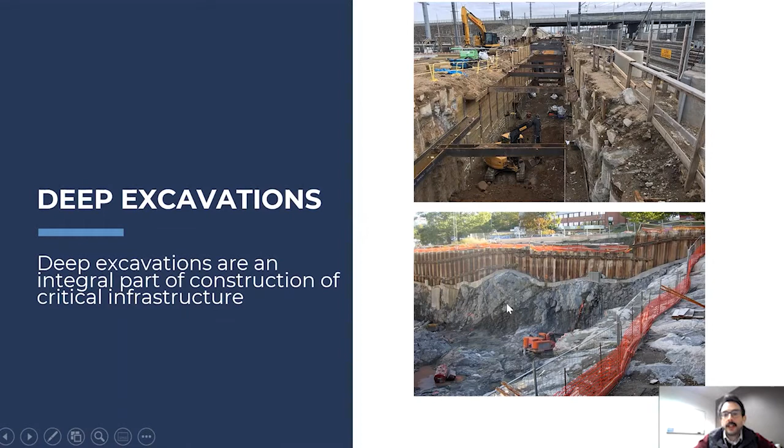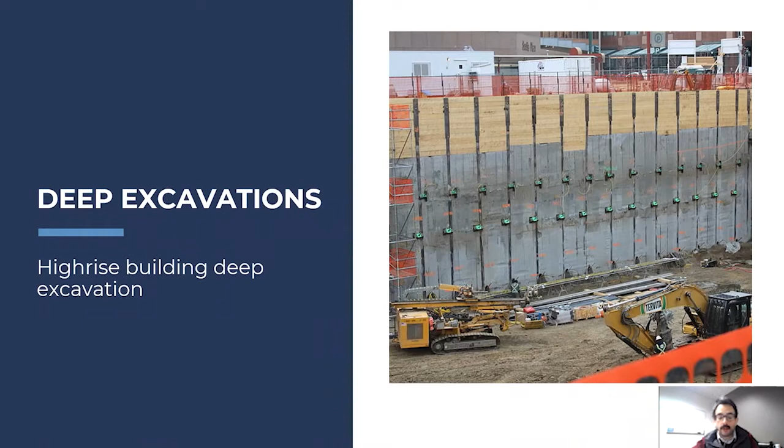The deep excavations are used in many applications. As we try to build in dense urban environments, deep excavations are needed more and more. For example, you see here a system for a high-rise building, and deep excavations have a few key interesting characteristics that are very necessary to develop our projects, but they also have high consequences if something goes wrong with them. So I'm going to share a few snips of some failures.

For example, about 20 years ago, massive damage on a deep excavation at Nicoll Highway in Singapore occurred, and we're going to talk a little bit about this at the end of this presentation.

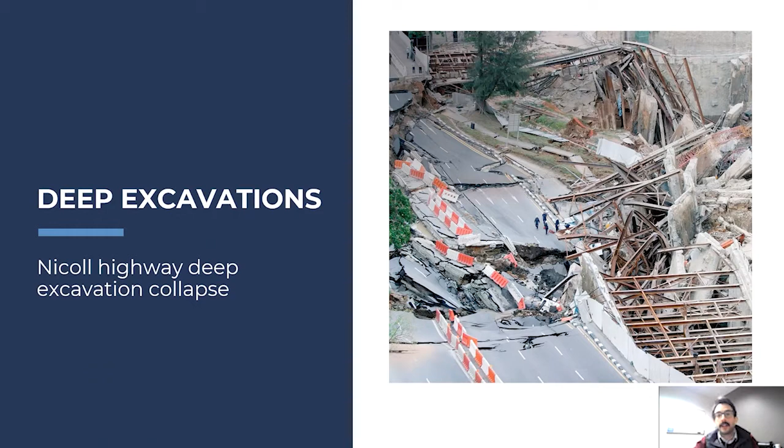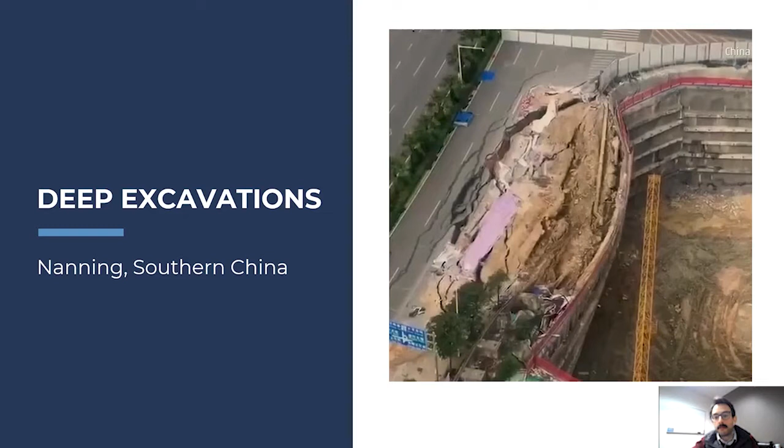Another deep excavation failure recently surfaced in the news, a project in Nanning, southern China, and you can easily find the YouTube video. You can see multiple levels of support bowing and allowing the soil to move.

Another very famous deep excavation failure happened in DC in the 90s. That's a deep excavation investigated by OSHA at the time. Fortunately, there was no human loss during that.

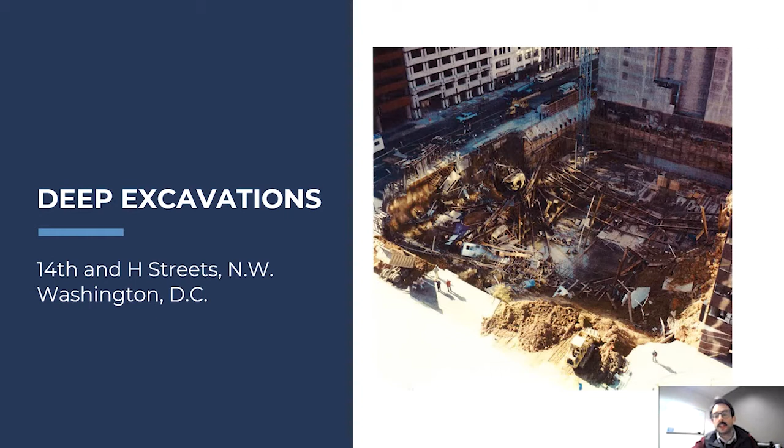So, with that, deep excavations are necessary. Deep excavations are risky, but we know how to design these deep excavations, and we know how to construct them well. With this seminar, my hope is to cover some general introduction about the systems. We're going to talk about some basics of their design, and we're going to cover some very specific challenges on deep excavations, how to manage the risk of these projects, and how to monitor their performance.

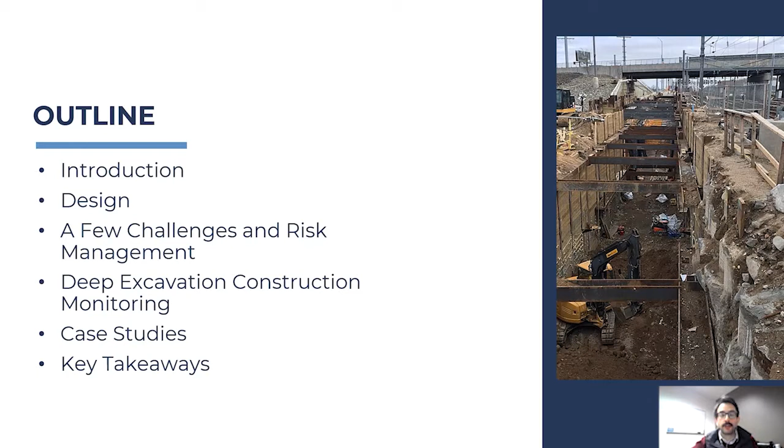At the end of this webinar, after we've gone through the basics, I want to combine all these theories and practical guidance with 3 case studies and talk about some key takeaways. In the middle of the presentation there will be a few questions, and Jay will pop up a nice poll for you to provide your answers.

So let's really start from the basics. Deep excavations are basically excavations that are more than a few feet deep, and because of that we need to find some way to support the soil on the sides so that it doesn't fail through the open excavation.

The support of deep excavations can range from structural walls with bracing to soil nailing. These excavation support structures can be either temporary, that we only need during construction and then we're done with them, or they could be permanent, where we need to perform this excavation support and leave it there because that's the actual long-term project we're constructing.

The stability of these systems must be maintained at all stages of excavation, and that turns out to be a quite complex operation. It's also very important not only to control for stability, but also to provide deformation control—making sure that our support of excavation system does not move too much, and adjacent structures also do not move substantially because of the performance of the support of excavation systems.

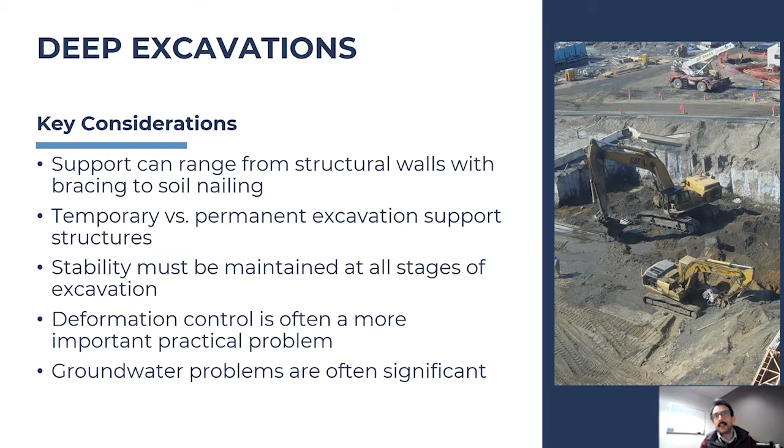An interesting thing to note is that these four systems that I just presented were mentioned in order of increasing stiffness. Generally, soldier pile and sheet pile tend to have the lowest stiffness, and secant or tangent pile wall systems tend to be stiffer.

Typically, we create these cantilever systems to support deep excavations that are not extremely deep. It's not very common to use this system for excavations deeper than 30 feet. Generally, the maximum excavation depth is controlled by soil resistance because this is what provides the support to our wall.

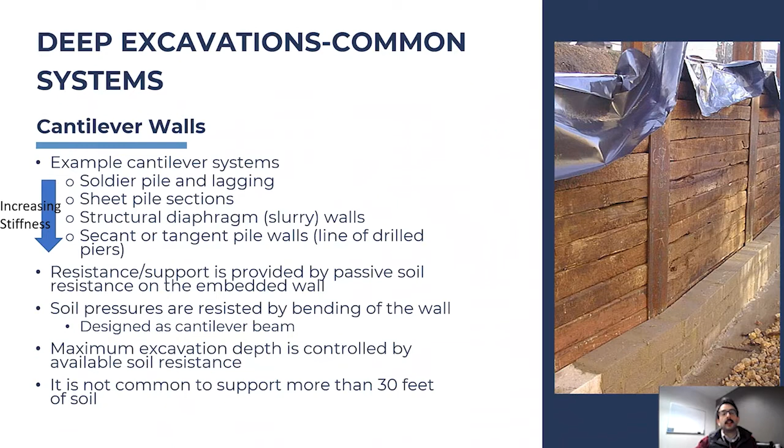However, we can also have tension elements, for example tiebacks. These elements can be temporary or can really be a permanent part of a structure. For example, if this deep excavation was part of a big basement building, the bottom slab of this building may actually be providing some long-term compression support for this particular installation.

When we have anchored systems, there are many different designs, and those can have anything from lower to higher stiffness. The anchors can either be grouted into the soil or grouted within the underlying rock.

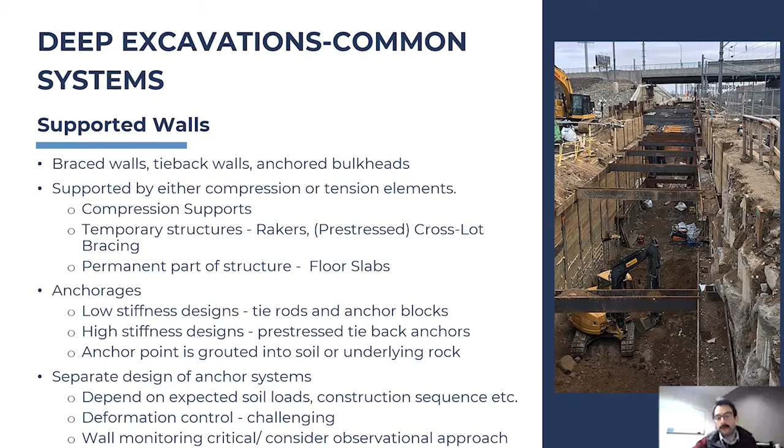So let's focus a little bit more on braced excavations. Braced excavations is one type of support where the walls of the excavation are supported with braces, and this lateral support system may be braces on one level or multiple levels of support. Sometimes there can be bracing that goes across the entire lot.

The three main geotechnical issues we're trying to address when we do our design: number one, we need to design the bracing based on the maximum expected loads. Number two, we need to maintain the stability of the excavation at every single stage of construction.

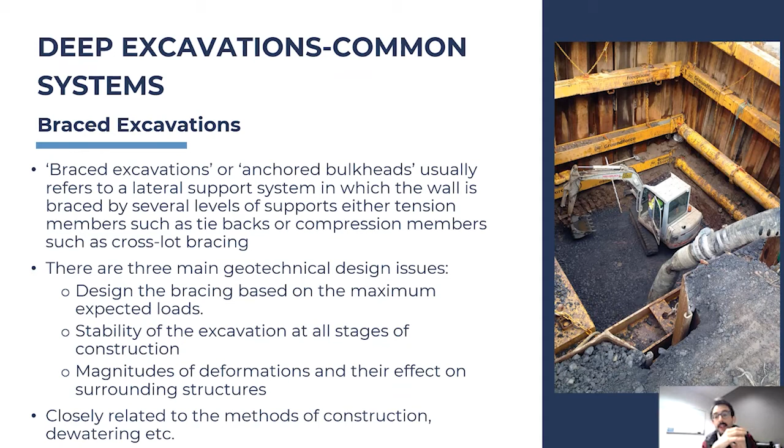Even if we have a structure that's stable with members having strength higher than required, we may need to control the deformations and their effects on surrounding structures. Because of all these design issues, we generally need a very good understanding when doing our design of the actual methods of construction, the dewatering being performed, the actual sequence of construction, and very good communication between the design team and the contractor team.

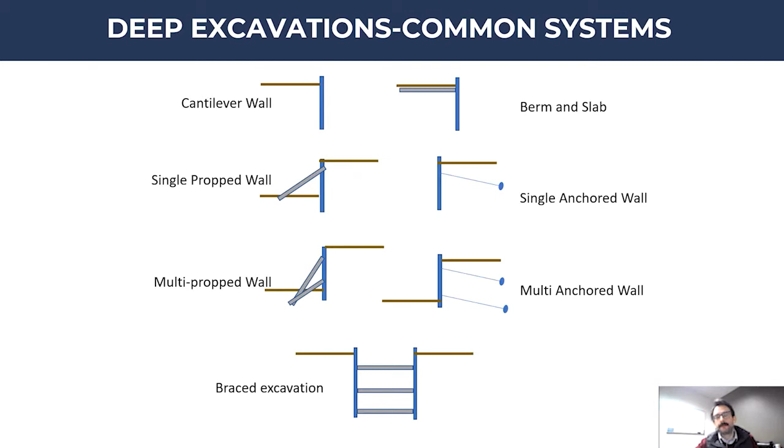One thing that contractors know generally how to do relatively easily is soldier pile and sheet pile walls, and these provide low initial costs.

But if you remember our discussion that we had a few moments ago, this type of wall tends to deform more compared to other walls because they generally have lower stiffness than other systems.

Another interesting thing to note is that if you want to provide supportive excavation at a deep soft clay type of site, it's really hard to get a tieback capacity, so it's not the right type of place to put anchors. You can still design them, but it's generally not going to be easy.

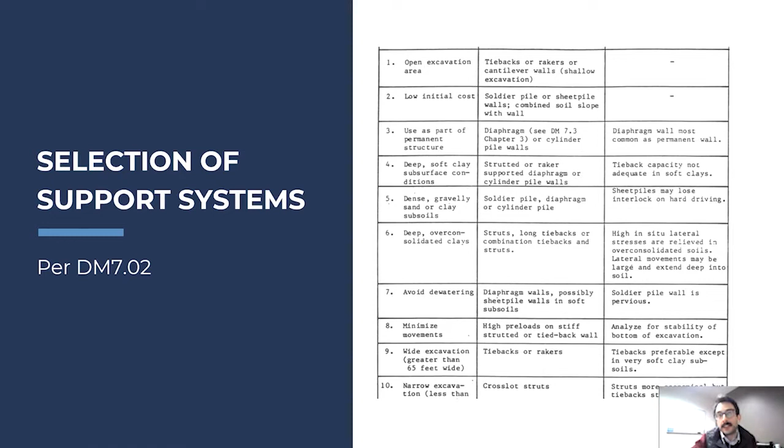Another thing that's important with the selection of the support of excavation system is how they affect the groundwater table, lowering it outside the perimeter of our project. For example, if you look at number 7, one recommendation is that soldier pile walls are generally pervious, and that's something you need to account for if it can affect adjacent structures.

So let's start talking a little bit about the design of this system. We know what they are, we know how they look, and their main function is to support the soil, and support it in a way that may also need to control deformations.

So if you're in the condition that your wall is moving away from the soil, this is the Rankine active condition. If your wall is pushing towards the supported soil, this is the passive condition. The horizontal passive earth pressures can be much higher compared to the active earth pressures for the same soil. However, you need different levels of deformation to reach active versus fully passive pressure conditions.

For example, one precaution used traditionally is that the passive earth pressures you may be assuming for your design may not be accounted for fully, and there may be a safety factor applied specifically on the passive earth pressures to account for the fact that you need some more substantial level of deformation to activate passive earth pressure.

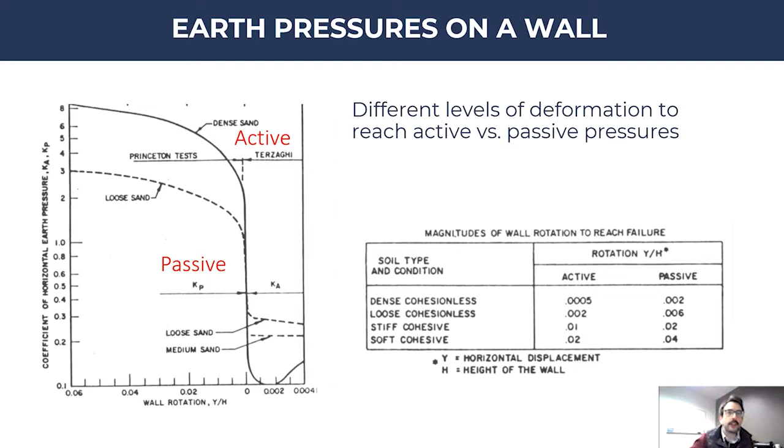So let's think about these diagrams a little bit. As geotechnical engineers, we're very used to seeing pressure diagrams that start from zero at the top of the soil at the ground surface and increase linearly with depth. Similarly, horizontal pressures may have a similar progression with depth. However, what you see in these diagrams is quite different.

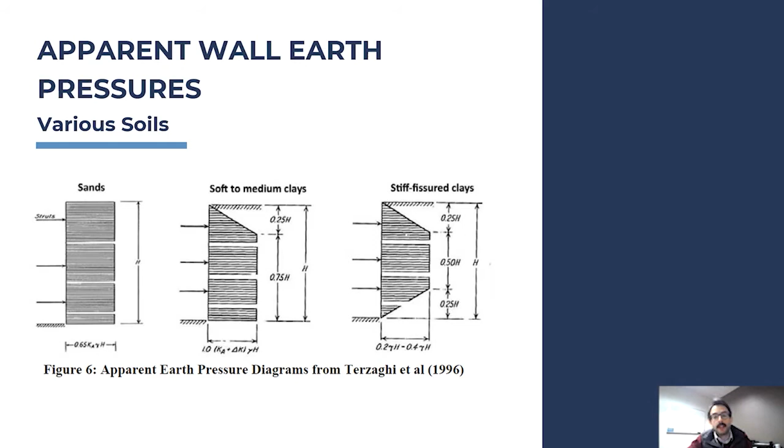The really key point to know about apparent earth pressures is that they do not necessarily represent the actual soil loads. They do represent the maximum soil loads that will be experienced at every level of excavation while the excavation is taking place, providing a locus of these maximum pressures that can be used for our preliminary design. So it's quite different from the actual Rankine active and passive earth pressures.

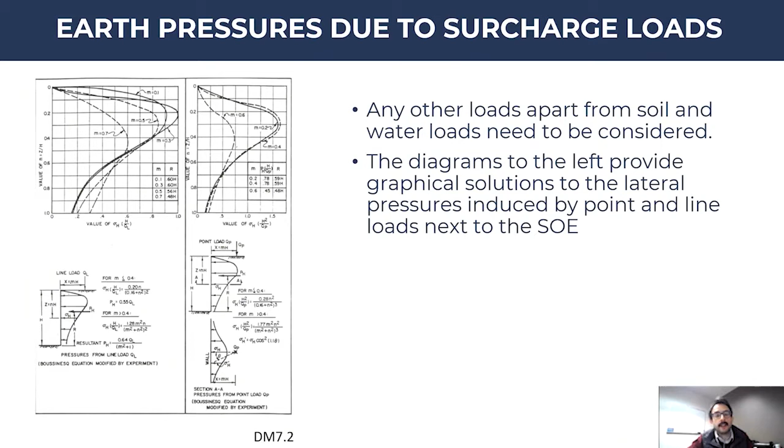That can be easier or more complex, and if it's more complex, a simple diagram like that may not be sufficient.

Another thing that's quite common in both sands and clay sites is you need to make sure you account, on these deep excavations, for the stability of the base of your excavation.

In many situations, you may require a more complex solution or a finite element analysis. If your retaining wall is in clays, you expect much smaller seepage going into your site. However, in clays, you may have to account for basal stability, and you may need to even use slope stability software to evaluate that.

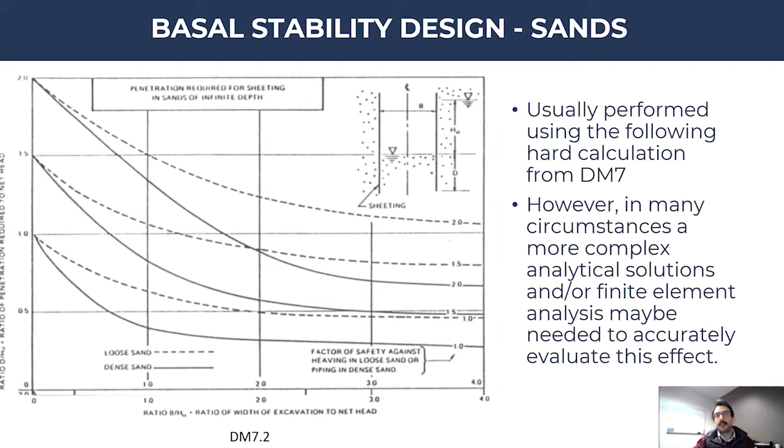And then there are a lot of internal components on the wall, on these supportive excavation walls, you need to be designing for. I'm going to just briefly mention here some information about anchor and tie rod design.

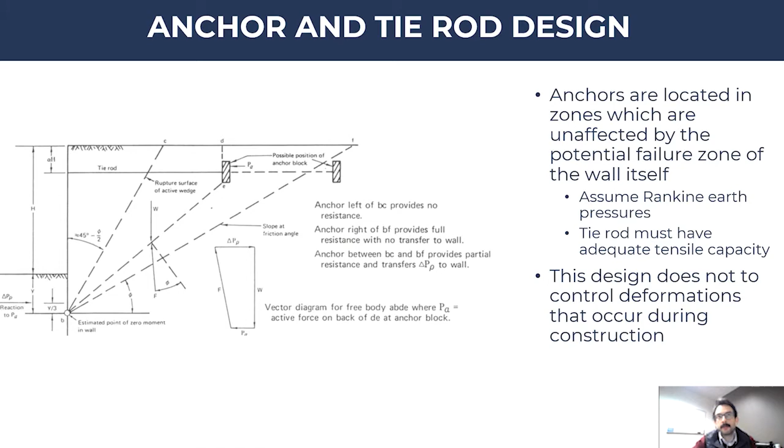At the same time, the actual anchor block should be designed in a way that supports the tie rod's expected loads. And the anchor block can actually be designed quite straightforwardly.

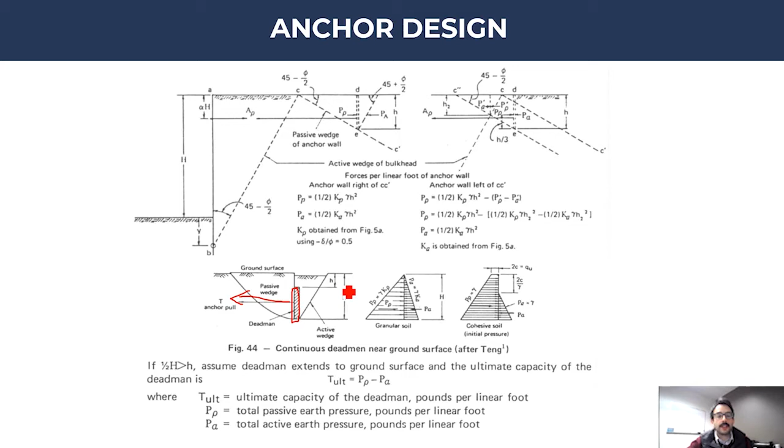So with that, I hope you just try to scratch the surface of how complicated deep excavations can really start to be. If you start to really consider the appropriate soil constitutive behavior and the complexity of the structural systems and the soil structure interaction, some of the answers you want for your design may not be easily obtained by simpler solutions.

One way that's used more and more these days is to perform finite element analysis of deep excavations. There are quite a few challenges when we use finite element analysis, and one key issue is modeling the appropriate constitutive soil model response. We can have a lot of different soil responses and soil behaviors that may be useful for our analysis.

We may need to consider the drained response of the soil, the undrained response of the soil. We may need to consider partial drainage and flow, and we may need to consider partially saturated behavior.

Then the other part is to appropriately model our structural performance. If we create a model of a deep excavation, we need to have enough complexity that the structural system is sufficiently modeled. And then we need to know that the soil structure interacts in our model in a way that's appropriate and realistic. In its simplest form, we may need to provide the right frictional interface of structural components and the soil. In some other situations, we may need to provide the TZ response or PY response of pile elements.

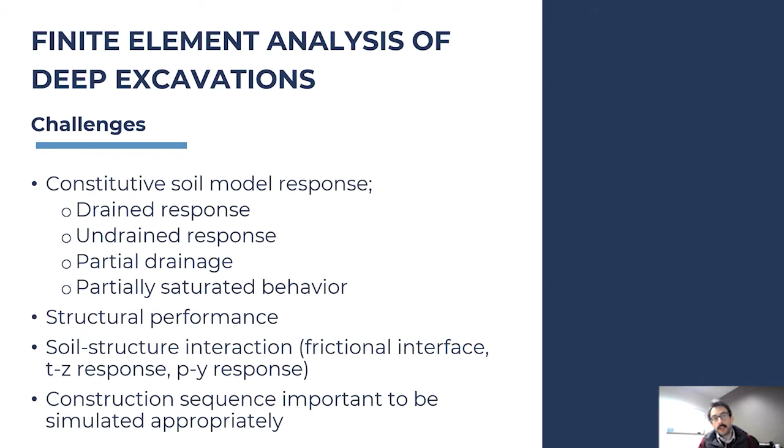And again, as we mentioned a few slides ago, the construction sequence, all the construction activities that are going on, including dewatering, waiting times, are really very important, and we need to make sure that these are simulated appropriately. One of the uses of finite element analysis is really to control for displacements.

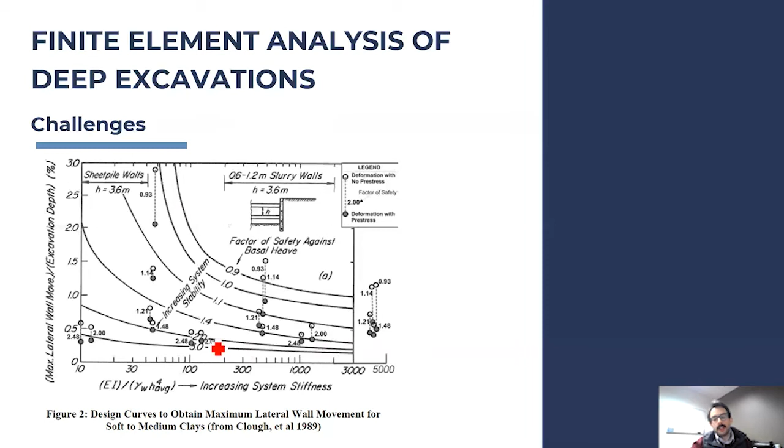Okay, so now deep excavations, as we said, they're big operations. They involve a lot of time, a lot of construction activities, and they're complex. And because of that, it's quite important to be able to analyze the risks of them as construction projects. Just to give you an overview, what I call risk management here is a systematic approach of identifying, analyzing, planning, monitoring, and responding to project risk.

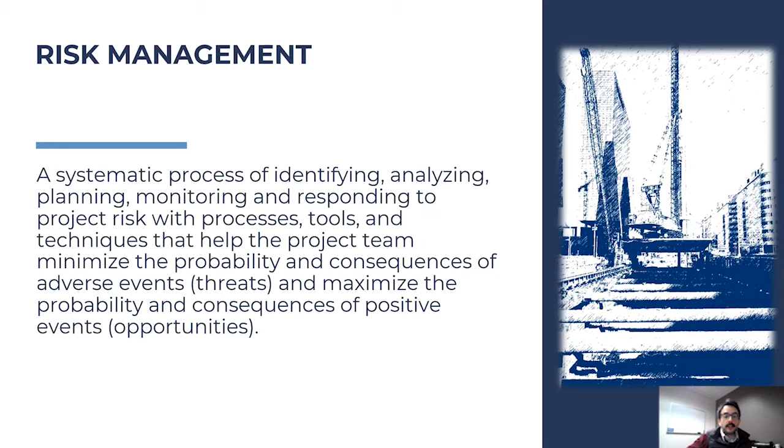And the way to do that is you can do that with processes, tools, and techniques that can minimize the probability and consequences of adverse events, and also maximize the chance that good things happen, positive events. So a few fundamental things we need to be doing when we're thinking about risk management is we need to know what the risks are and what are their potentials in cost, schedule, quantity, and we need to eliminate, mitigate, or avoid risks when able.

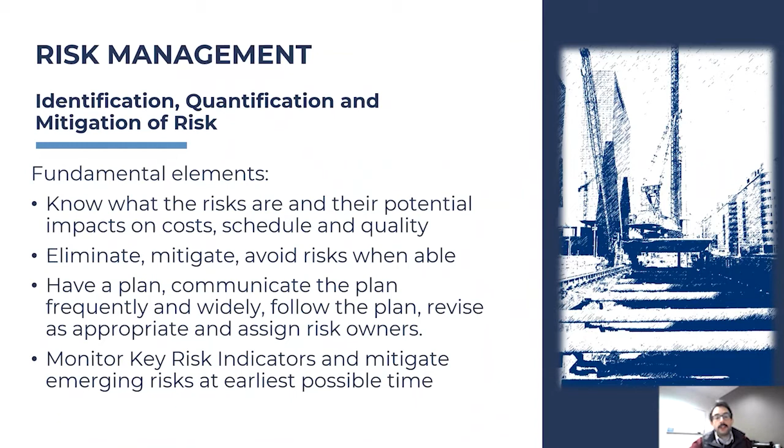We need to have a plan and communicate that frequently and widely, and we need to have something quantifiable to measure. That could be some key risk indicators. And as we're able to measure these indicators, we need to find a way to mitigate these emerging risks. So some key actions on performing risk management in general, and then we're going to talk about specifics on deep excavations.

We need to, number one, plan a risk management approach. How will the project approach the risk management? We need to be able to identify the risk events. We need to be able to analyze them. In some cases, we're able to qualitatively analyze the risks; in others, we have the opportunity to analyze them in a quantitative way.

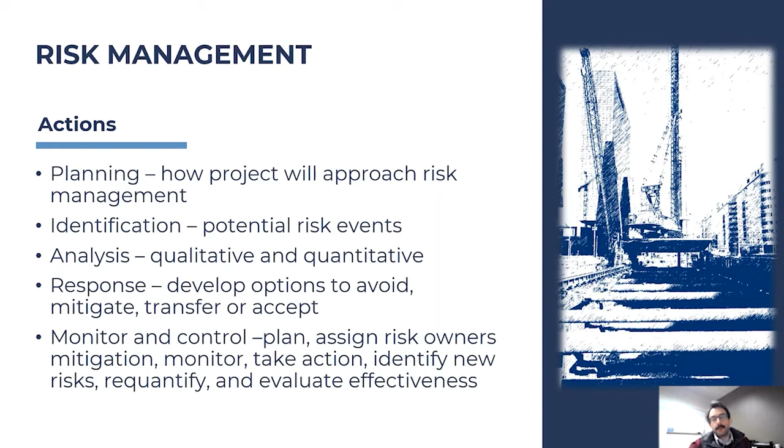We need to develop a response. And as we discussed, we need to monitor and control. And then we may need to go back to our drawing board and update our risk management system as the project moves along and some parameters change.

Now, in a few large projects, we can find some similarities. Number one, the bigger the project, the less likely one or two people can really get their arms around a balanced assessment of risk. And the contractors generally price the risk.

They may understand that there is risk and they may increase their price to do a more risky job. But one thing you need to be thinking is, do they have an objective and even quantifiable approach to do this? Sometimes various contractors may choose to transfer the risk from one to the other, but this transferred risk is not really reflecting a reduced overall project risk. And sometimes competitors on joint venture teams don't talk openly.

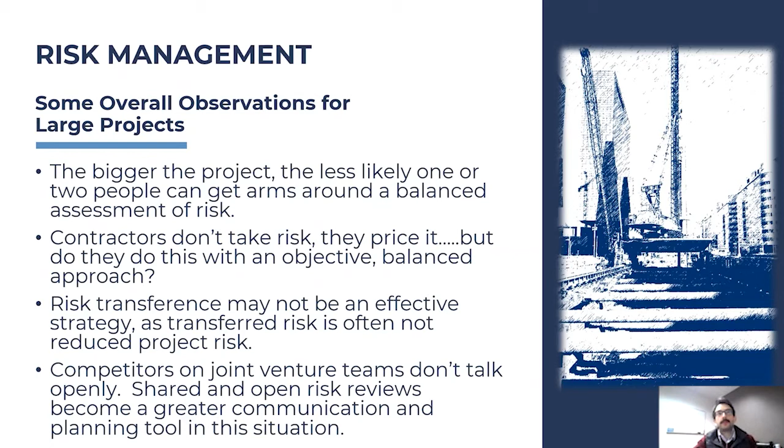So when we have shared and open risk reviews, this can be a great planning and communication tool that can be very useful. When we take care of our risk and manage it, we're able to reduce the project cost and delays. We can create a systemic, balanced framework to identify, communicate, and manage it. We can provide an independent assessment of the risk that doesn't have internal biases. Some entities in construction projects choose to do their own risk assessment, but that's bound to have some internal bias.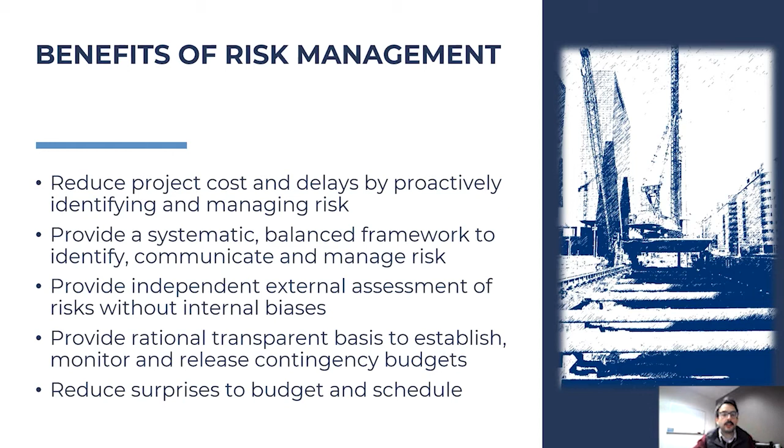With risk management, you can provide a rational and transparent basis to establish, monitor, and even release contingency budgets. And if you manage your risks well, you can really avoid surprises in budget, schedule, or any other losses that could be important. So specifically, in deep excavations, there are a few key considerations that make deep excavations quite risky.

Some of the things we need to be thinking about: number one, can the deep excavation system fail? That could be anything from a bearing capacity, basal stability, or global stability failure, or it can be a structural failure. Then we need to be thinking about damages to adjacent buildings caused by deformations or other contributing factors. We need to be thinking about groundwater control inside and outside the excavation, and a series of other issues such as potential for loss of productivity, delay, or even loss of life.

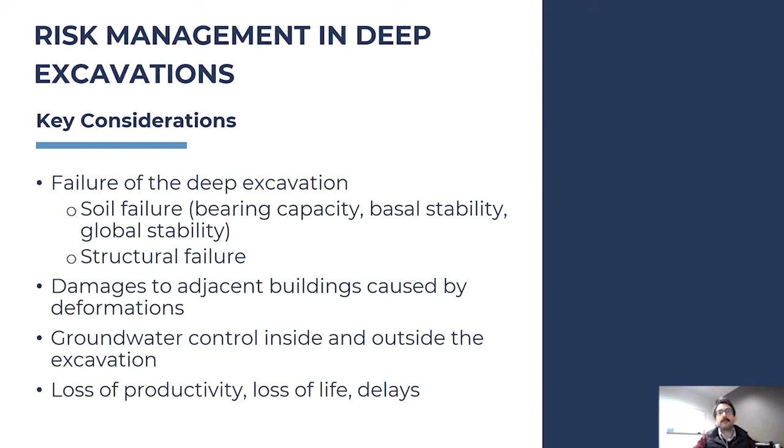So if I were to show you a quick visual of how some key failure modes in deep excavations look like, you can see a series of structural potential failure modes, such as the struts failing out, the connection failing, or actual buckling of the support, or the wall may actually fail in bending, axial loading, or shear.

And then this figure also has a few geotechnical type failure modes, which could be bearing capacity issues of adjacent structures, global stability, bearing capacity of the wall, especially if that temporarily or long-term supports other loads, or a potential for seepage uplift. We discussed that quite a bit.

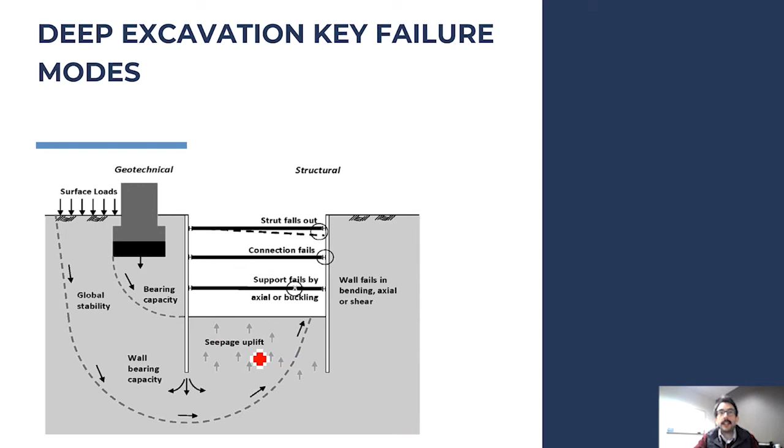Now, one of the common effects being discussed, especially in urban environments, is the effects of deep excavations on adjacent structures. With this brief sketch, I'm showing that once the retaining wall moves laterally—and generally in most situations a retaining wall will move to some extent laterally unless there is an extremely tight deformation control—

as this occurs, the soil will move also laterally and vertically, as you see on these plots. And if there are buildings placed above that soil, that can cause differential settlements or total settlements that can contribute to damages within the building. This could be structural damages, or they could even be mechanical damages, affecting piping connections, the water connections, or even stormwater drainage within that building.

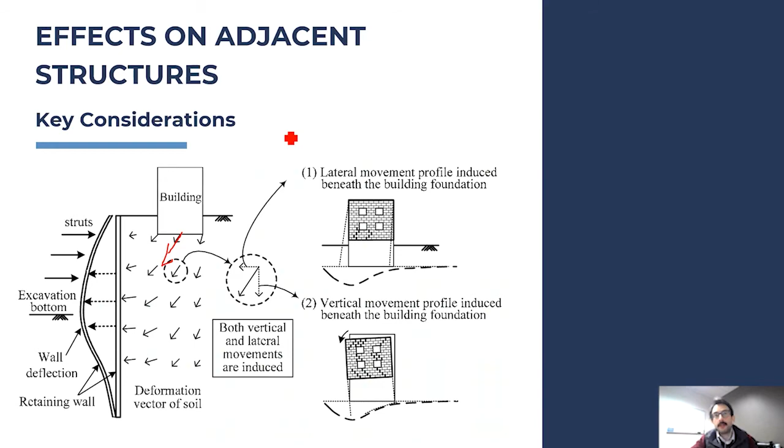And the question you may be asking: how important is that effect? Well, these deformations next to supported excavation systems have been measured over and over again. As you see in this figure to the left, these are a series of real data measured at a few different sites. You can see most of the deformations occur very close to the retaining wall, and once you exceed about one excavation depth of distance, you expect smaller deformations occurring within the soil, but again, they're not negligible.

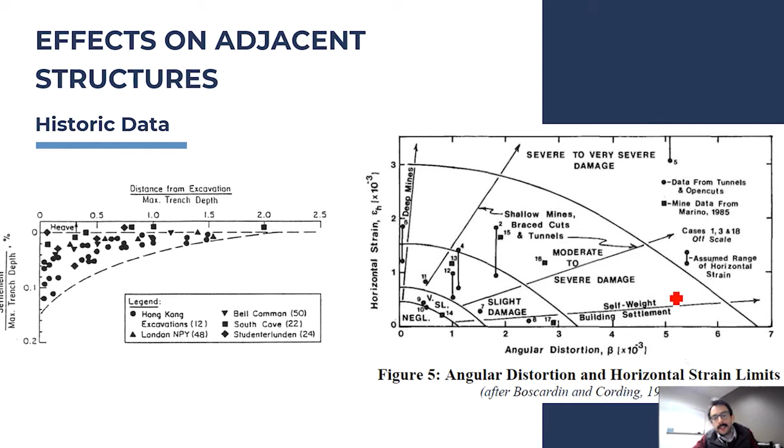This is established over and over again, and Boscardin and Cording in 1989 also published this very interesting chart that shows how angular distortion, shown on the x-axis, and horizontal strain correlate with damage to various buildings. You can see, for example, the building settlement is generally along this line, and you can see how increasing angular distortion will cause substantial differential settlements, and it can cause severe damage after we exceed some threshold limits.

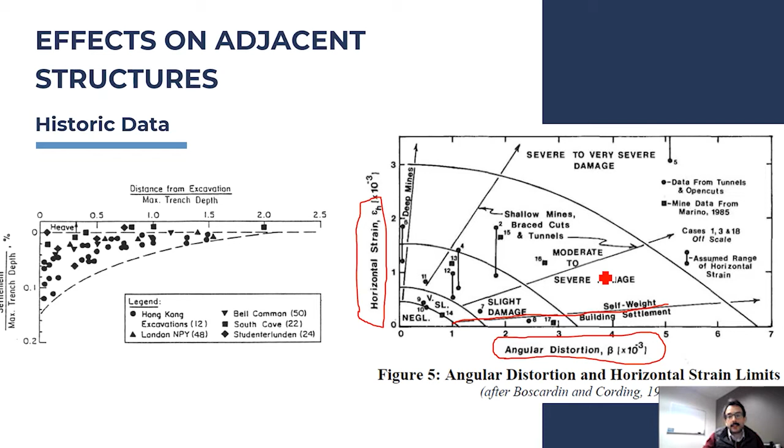So all of this is very important, because of our need to optimize our design and our need to also control the risk of deep excavations—we like to monitor our deep excavations.

Generally, what we want to be doing is accurately predict lateral soil loads, structural forces, moments, and soil deformations. Because even though we do our best as design engineers to appropriately represent those conditions, the actual field-scale experiment of constructing the site is going to be very insightful to help us see if we need to update our design assumptions.

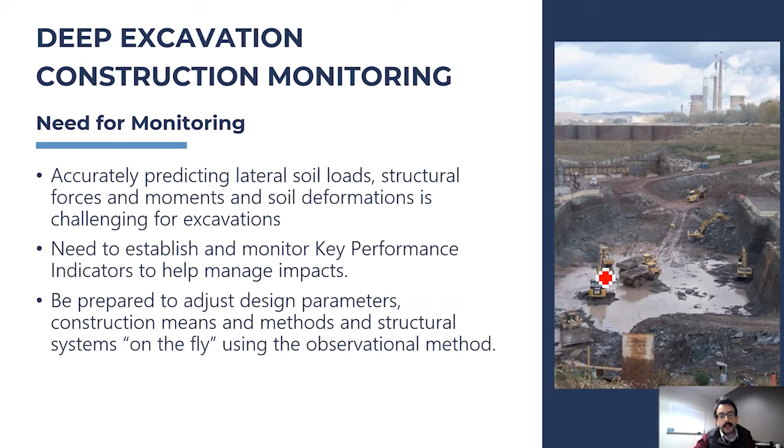So in order to do that, we need to establish and monitor some key performance indicators—things that we can quantify, measure, and use to review our design. We need to be prepared to adjust design parameters and potentially use the observational method.

Some key performance indicators generally used are: lateral wall deflection, soil settlement and lateral movement, stresses within the struts, the anchors, or any pre-stressing wires, pore pressure changes within the soil, the potential movements in adjacent buildings and utilities, and we may need to control for vibrations due to construction activities, which could be anything from pavement breaking when the project starts, to pile driving, if that includes some soldier pile installation.

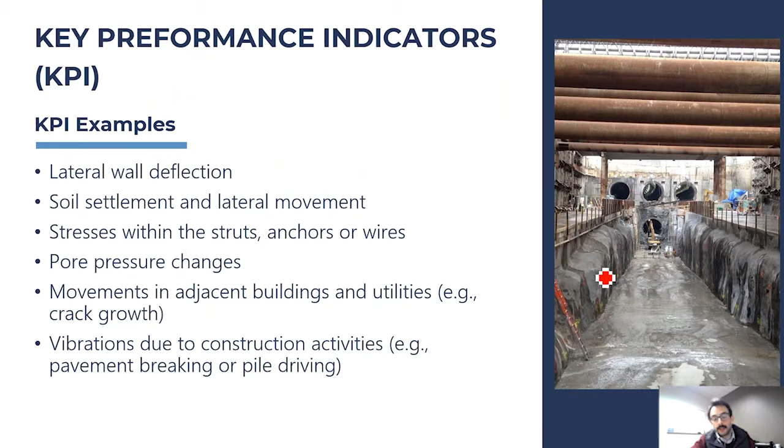Now, luckily, we do have quite a lot of instruments to use these days, so I'm going to go through quite a few of those.

Here at Geocomp, we have experience with a great variety of these sensors, and we've used them in a lot of our projects. One key thing that's quite easy to do these days is that for a lot of these sensors, we don't necessarily have to have staff go monitor them every day. We can automate data collection and get valuable insights almost in real time, and provide risk alerts and alarm levels if necessary.

A few instruments we like to use: number one, inclinometers. They're used to measure horizontal displacement of the soil, generally by lowering a probe into a flexible vertical casing.

Then we have piezometers, which monitor pore water pressure in the ground. There's a variety of piezometers - we can monitor pore pressures using observation wells, standpipe piezometers, pneumatic piezometers, or vibrating wire transducers. One key question we may need to answer is whether we need to monitor pore pressures throughout the entirety of a soil layer, or focus on a very narrow, thin zone.

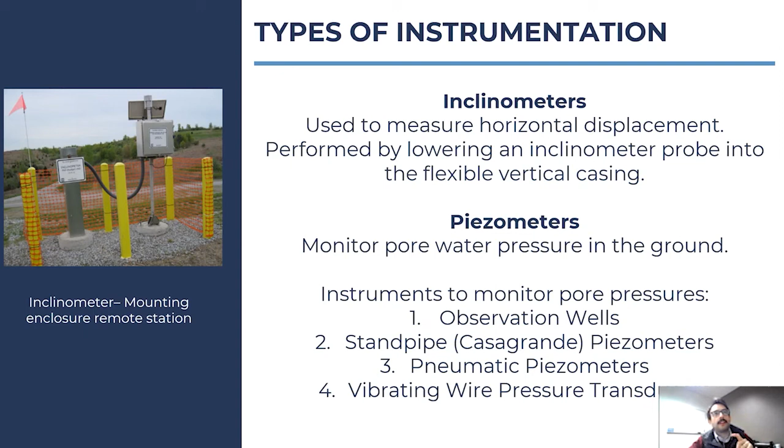Settlement plates are used to monitor change in elevation of a plate buried within a fill.

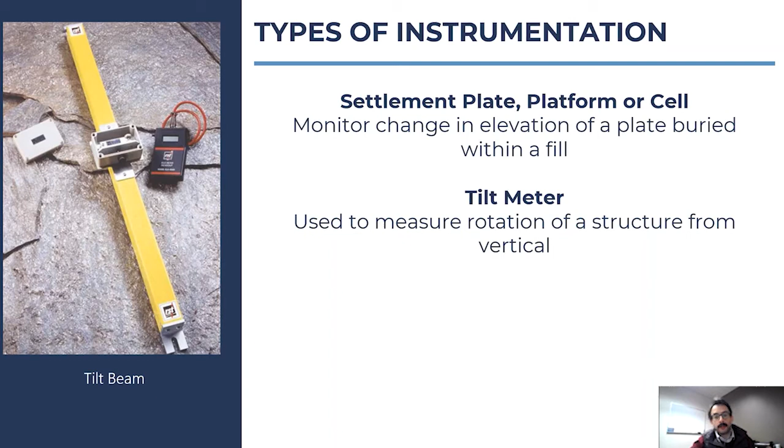You can also use extensometers, which are used to track slope movements or failures.

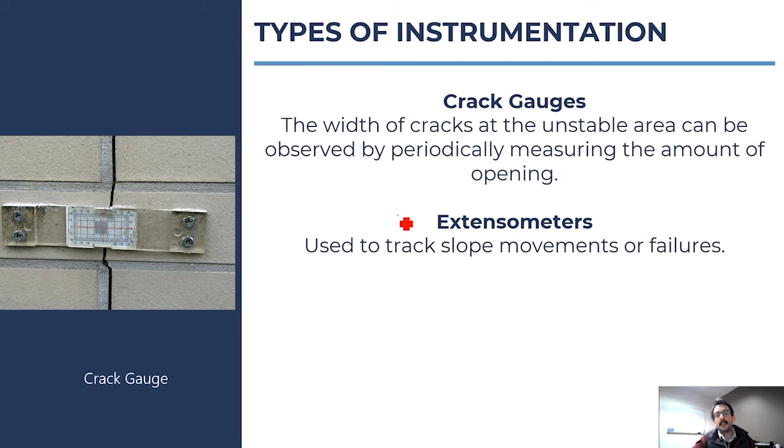Some instruments that you can use on the structure are strain gauges. You can put them, for example, on tendons or braces, and evaluate the change in stress experienced by a structural element. You can also use load cells to measure force in a structural member.

For example, you may even be able to use a load cell to measure the actual soil load on your wall. And then you can use accelerometers or geophones, which are velocimeters, to determine dynamic effects on a structure, or to measure velocities within the soil.

A common way to assess potential for vibration-induced damage to adjacent structures is to make sure that the peak particle velocities you exert in your construction do not exceed limits that are set based on the type of structure and type of geologic conditions you're dealing with.

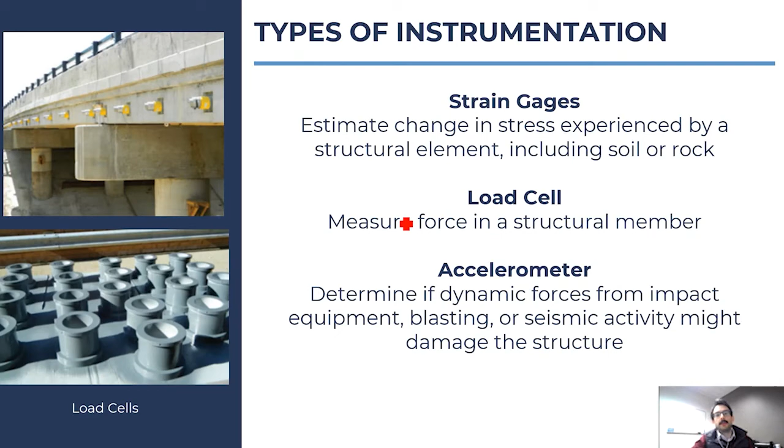Liquid level gauges are also commonly used to measure the change in elevation of a point located along a horizontal liquid filled pipe.

Automated total stations are used to measure distance, azimuth, and zenith to a reflecting target. And one of the really cool kids on the block used more and more these days is InSAR data, which stands for interferometric synthetic aperture radar. It's not instrumentation per se, but a remote sensing technology - it belongs to the wide category of things we can use to measure performance of our deep excavations.

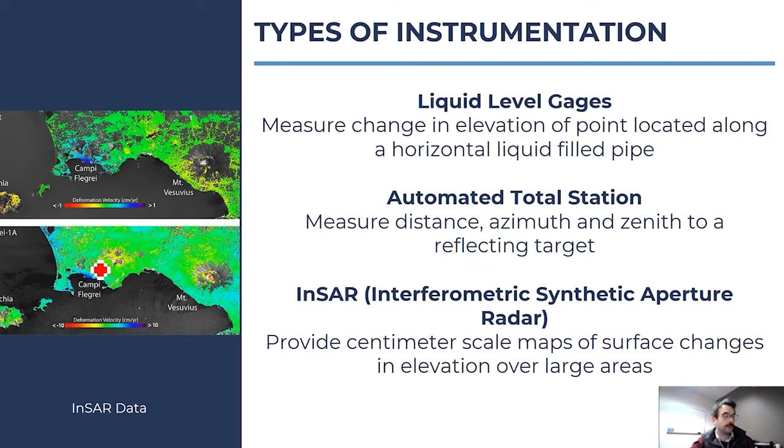This is an example of InSAR data - data collected by satellite that can provide information about surface change over large areas. The benefit is that we have a lot of historic data, so even if there's no sensor installed, InSAR data can sometimes be used to look back into the past and see historical performance.

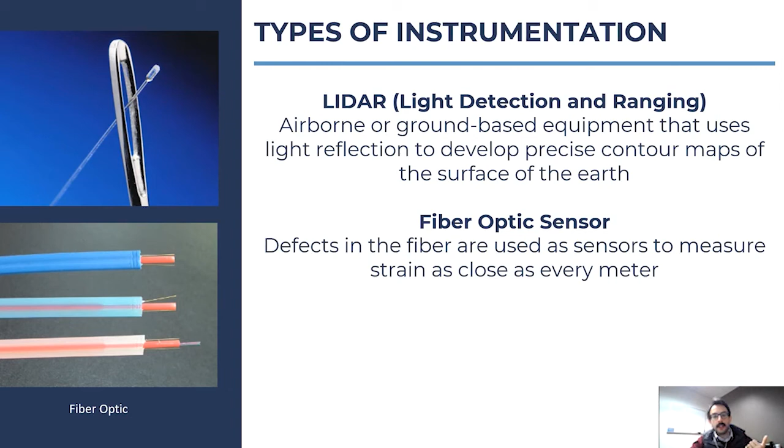Another thing commonly used is LiDAR, which allows creation of precise contour maps of the Earth's surface. And again, the latest kid on the block is pushing LiDAR away, because a lot of people are starting to use photogrammetry, which is much cheaper, simpler, and has started to provide contour maps of the same accuracy as LiDAR.

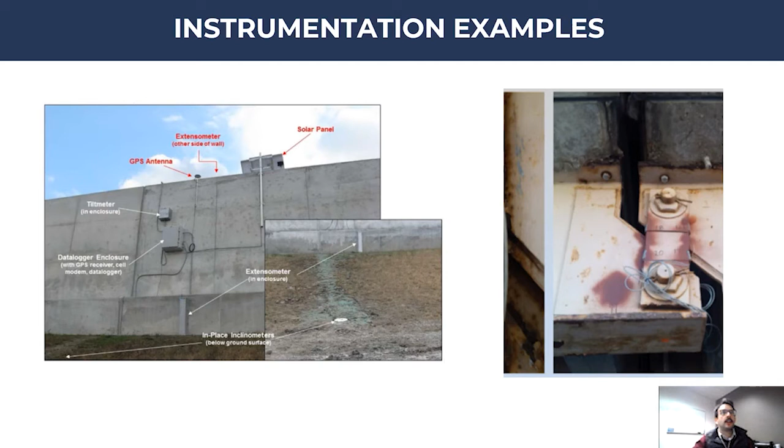So with that, I want to briefly go now, the next 5 minutes, to 3 case studies. Number one is a few years ago, we worked monitoring the LA Metro tunnel and deep stations construction.

We provided real-time performance monitoring of a variety of sensors. But the key thing I want to talk about today is that in one of the stations, the station circled in this photo, the engineer predicted a ground settlement of about 1 inch outside the station. We did extensive performance monitoring and were able to show that the dirt actually heaved 0.6 inches. The city was really questioning that, and they were very curious why these measurements were so different than predictions.

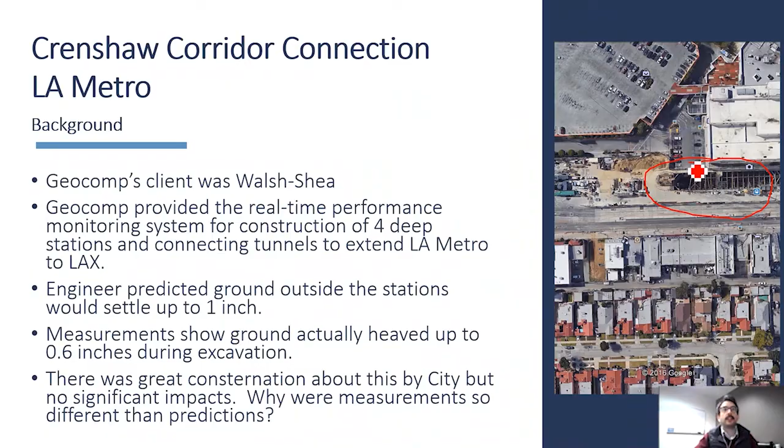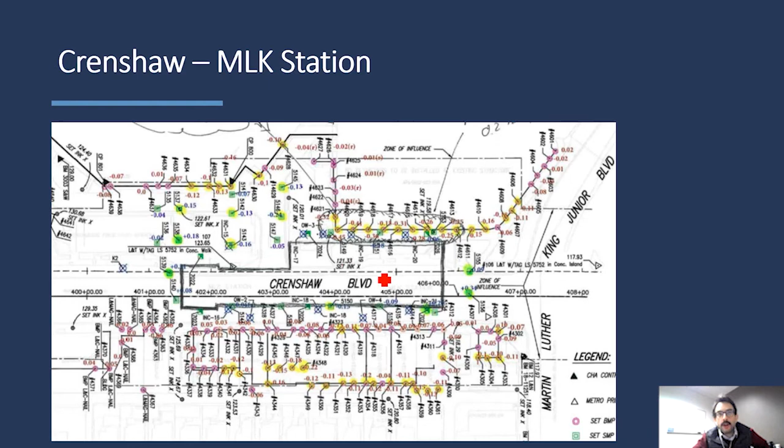This is a better overall view of the entire station, and the key figure here is a bunch of points annotated on the perimeter of the excavation that show consistently measured heave. This is another chart that shows, from January 2015 all the way to January 2016, an incremental heave occurring in a series of sensors. So it wasn't just a unique event, it was a general trend.

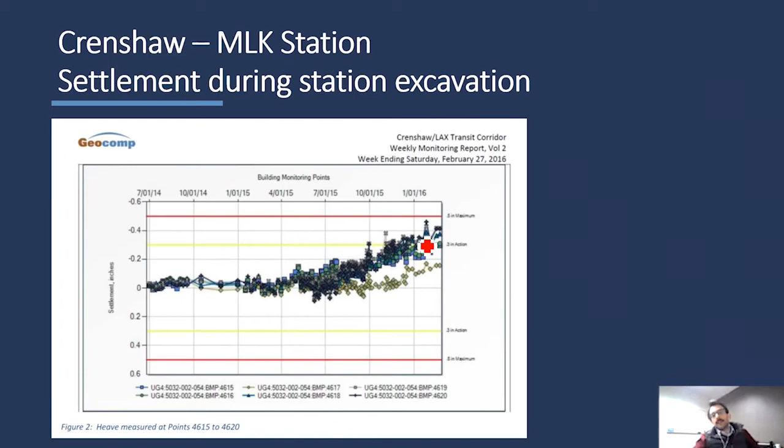So what was going on? Well, in a typical deep excavation, the soils may be soft, so you excavate and expect the soils to move. In this particular situation, the soils were very strong. In a typical deep excavation, you may expect the groundwater to be very shallow, or there will be some level of dewatering occurring, causing additional settlements. In this case, the groundwater was pretty deep. Also, in many cases, you may have a support system that is relatively soft, such as a sheet pile wall. The system in this particular situation was very stiff.

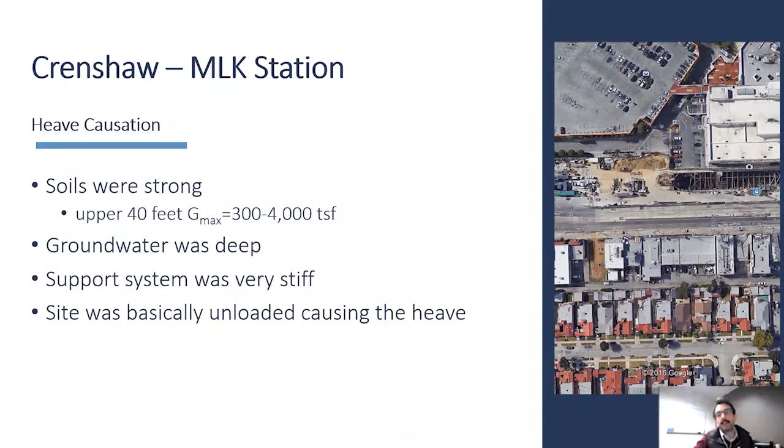So if you take out the 3 main reasons that cause settlements next to deep excavations, the only other big mechanism really happening is that you excavate the soil, so you unload. Because of this unloading, the only thing you can expect to happen is heave. So the effect of unloading was much more substantial. That was a very interesting finding.

Case study number 2. This is a case study we got permission to reprint from Structure magazine, and it involves the Nicoll Highway collapse. This was an excavation about 100 feet deep in deep layers of soft marine clay. This excavation collapsed on April 20, 2004.

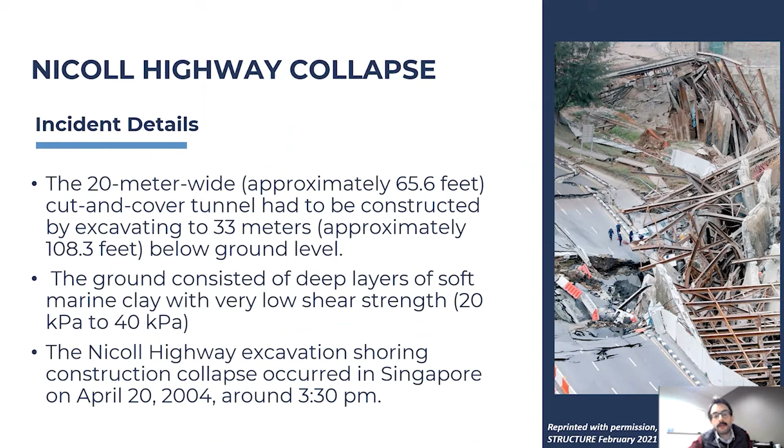The interesting thing about this collapse is that a finite element software was used for the design. The software allowed the design engineer to model undrained behavior using effective stress parameters. The design engineers took advantage of this and modeled the undrained conditions using effective stress parameters with a Mohr-Coulomb constitutive model, which was not appropriate to do that.

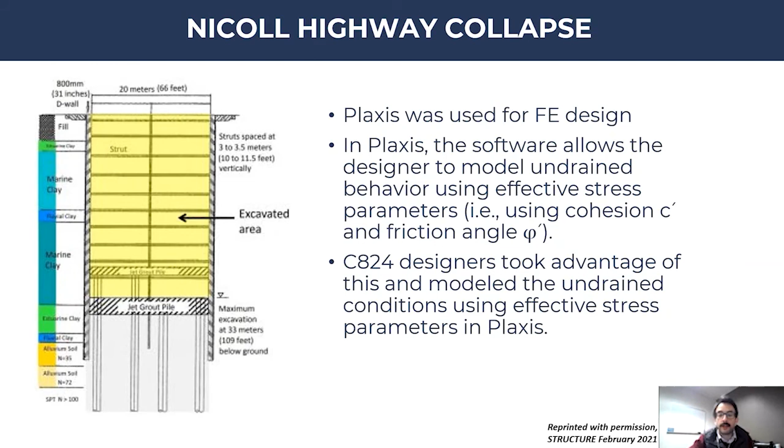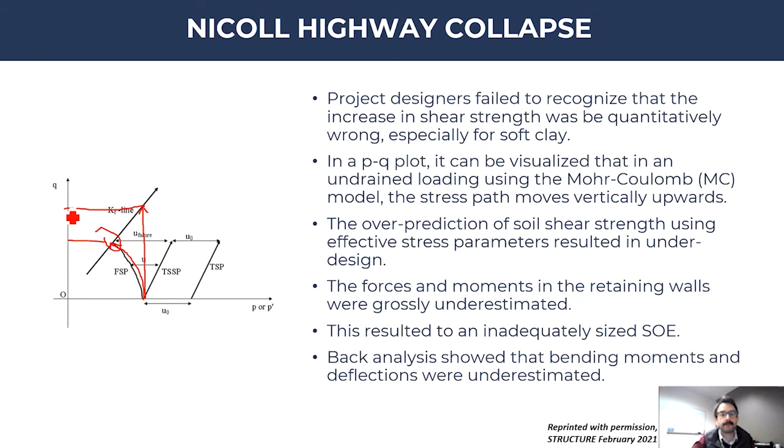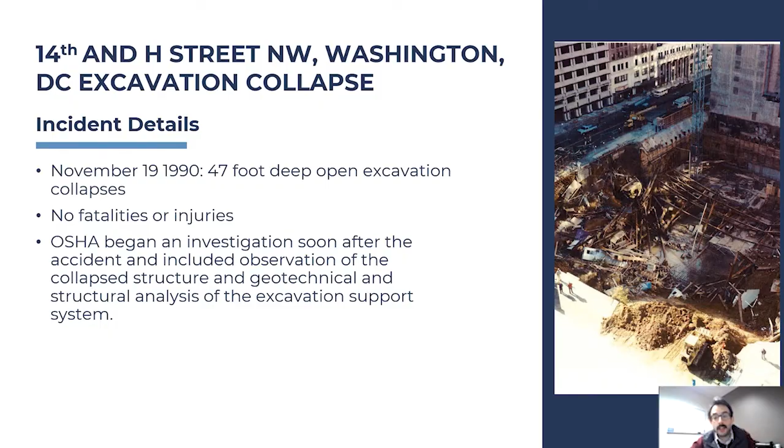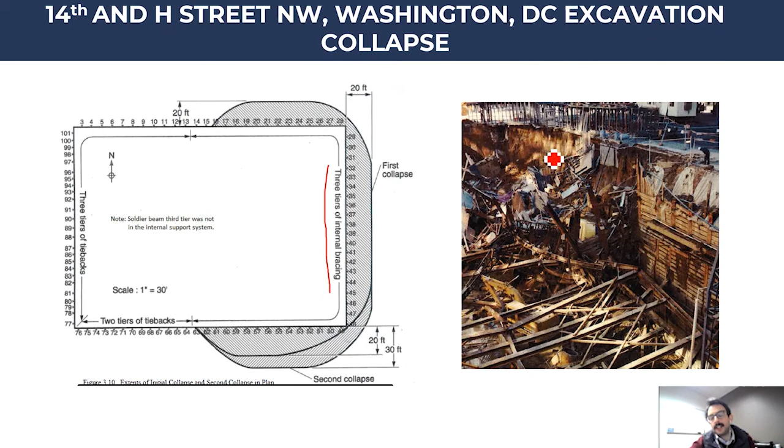That's number two. Number three, another quick and interesting case study is a failure that happened more than 30 years ago in DC. It's a 47-foot deep open excavation, and OSHA created a very nice investigation report out of that. You can see that this wall consists of 3 tiers of internal bracing at the east side where the first collapse occurred, and you can see how the collapse looks like. You can even see how the dirt stands vertical shortly after the collapse occurred.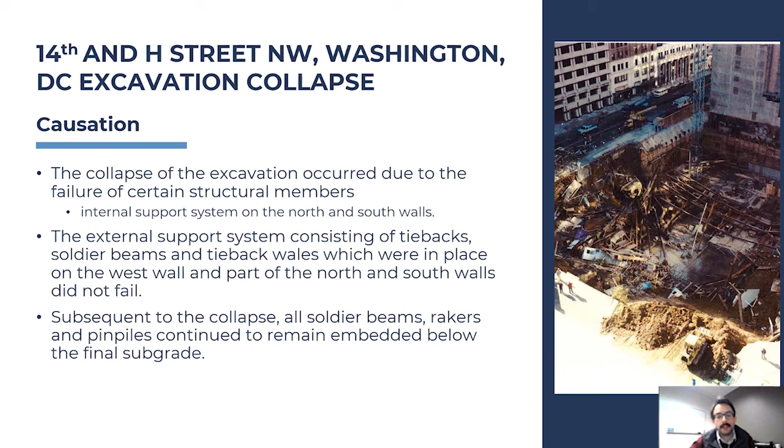So the main finding of this really highlights the need to have geotechnical and structural engineering disciplines work well together in a geostructural type of study that integrates everything. The collapse of this excavation really occurred due to failure of certain structural members. Some external support systems, such as tiebacks or soldier beams in the west wall, really did not fail. It was found that generally the soil pressures agreed with the expected loads. In fact, the soil load during failure was actually lower than the expected load for which the structure was designed.

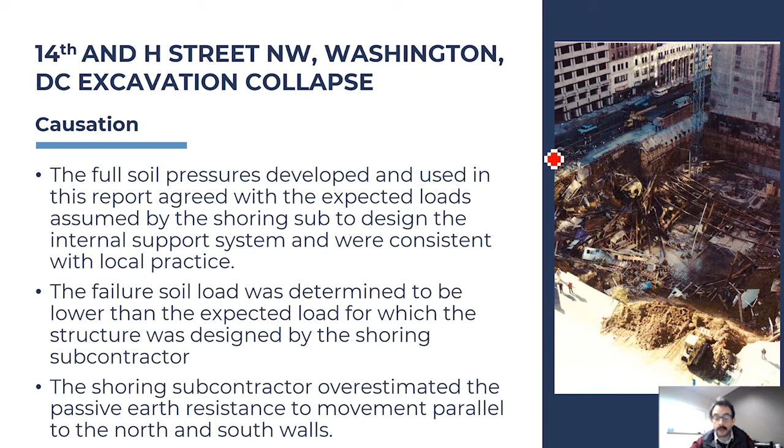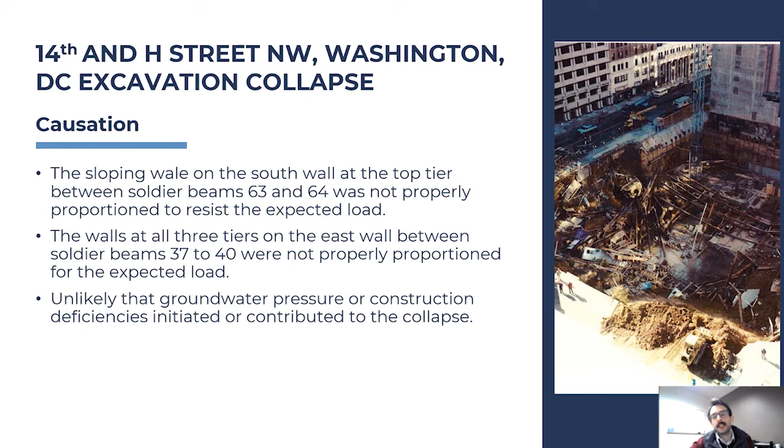However, based on these design soil loads, which were actually higher than the real loads during failure, some structural components, such as the wale at the south wall and some walls at the east wall, were not properly proportioned for these expected loads. So it was purely a structural failure caused by the lateral soil loads. The groundwater pressure in this particular case, or construction defects, really did not have a substantial contributing factor to this failure.

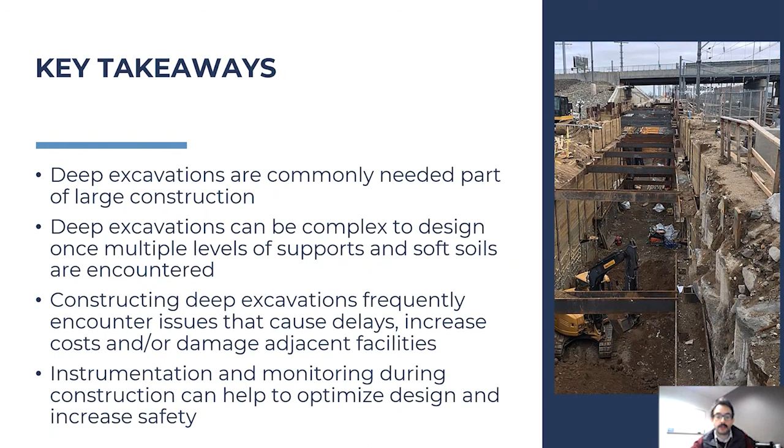So some key takeaways: we commonly need deep excavations in our large construction, especially in urban environments. This can be complex to design, especially when we have multiple levels of supports or soft soils. This is a construction activity that frequently can encounter complexities that cause delays, increased costs, or damage. However, by doing smart design, risk management, and instrumenting and monitoring our construction, we can optimize design, provide a project at a lower cost, and increase the safety of our system.

So with that, I know we're maybe one or two minutes late, but I can take maybe one or two questions. And of course, I welcome any questions, or if you want to email me, I'll be happy to respond.

Yeah, so thanks, Antonios, for powering through that. I know you've been feeling a little under the weather, but you did a great job.

Yeah, so we had a couple of questions that popped up in the chat as the presentation was going on. John Martin asked, is DM7 part of the NAVFAC design manual? That seems very specific, but maybe you know what he's talking about. Yeah, DM7 is basically the NAVFAC manual.

Okay, yeah. And actually, I'm very excited because one of the DM7s was recently updated. I downloaded it maybe a month ago. I want to say this is DM7.1, which I'm not sure if that's the one that talks about deep excavations, but I kind of urge everybody there to just download the latest and greatest. It has a very interesting section on selecting soil properties for analysis, and I really want to dive a little bit deeper on that.

Awesome. And then Rajan asked for you to comment on geotechnical lab testing, and for soils, what do you consider to be important for proper analysis and design of deep excavations?